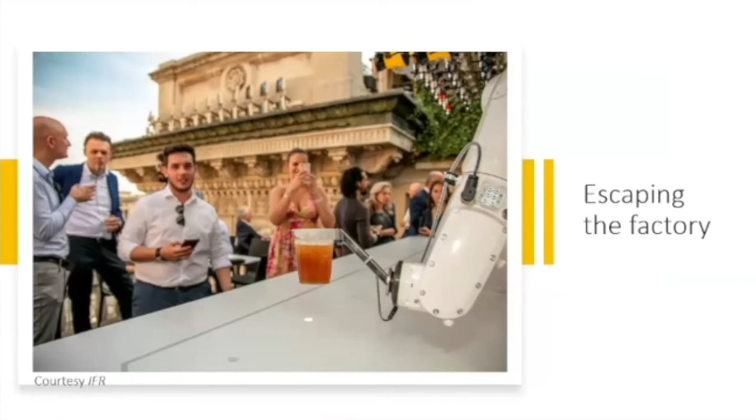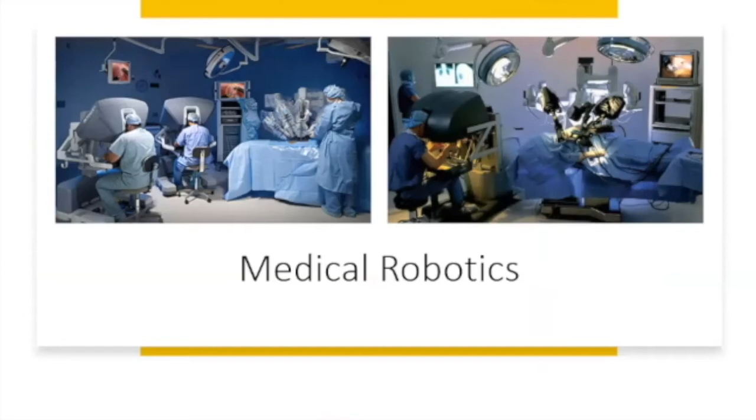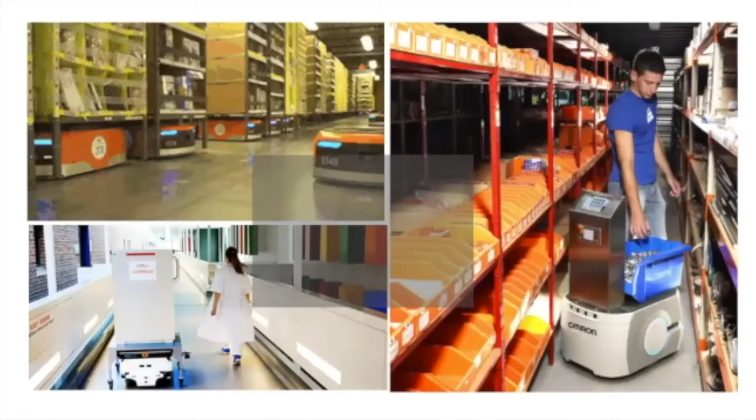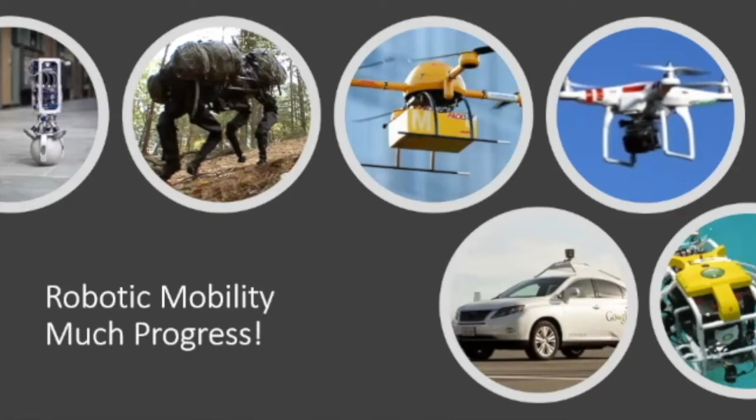Robotics is growing, and there is a lot of excitement and expectation in the world. Robots are leaving the factory floor, reaching closer to humans. In medical robotics, we are performing thousands of surgeries every day around the world. We are seeing major transformation of robots reaching applications in domains that were very difficult to reach, such as agriculture, field robotics, underwater, in mines, factories, warehouses, and hospitals. In all these areas, robots are becoming part of the environment where humans and machines work together.

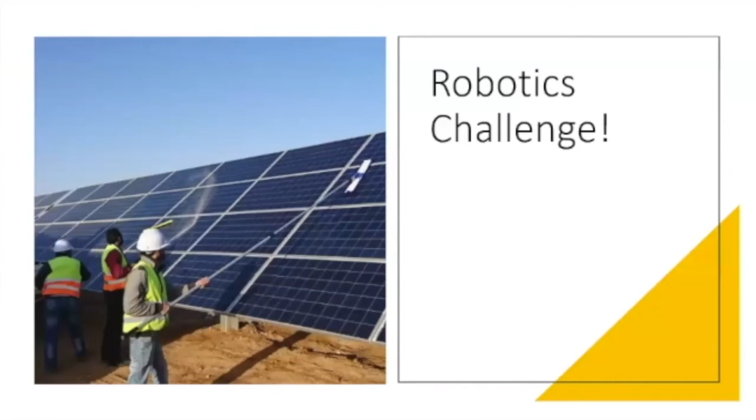A lot of progress has been made in mobility, and we see robots on land, in the air, underwater. We are also making progress in manipulation, which is much harder. Manipulation requires physical interaction with the real world, and there are many challenges to do this properly.

The challenge is that when we interact physically with an unstructured real environment, manipulation requires a lot of careful planning. The progress we've seen in manufacturing resulted from being able to place fixtures and structure the environment so we can pre-program the robot, which plays back the same task again and again.

Well, in the real world, the environment is not structured. Here you have an example of how a different modality of control allows us to perform the task. Here, we are relying on contact, and the contact is guiding the motion. The robot is rotating and moving in the right direction based on the reaction forces it feels. This is key to bringing robotics to unstructured environments.

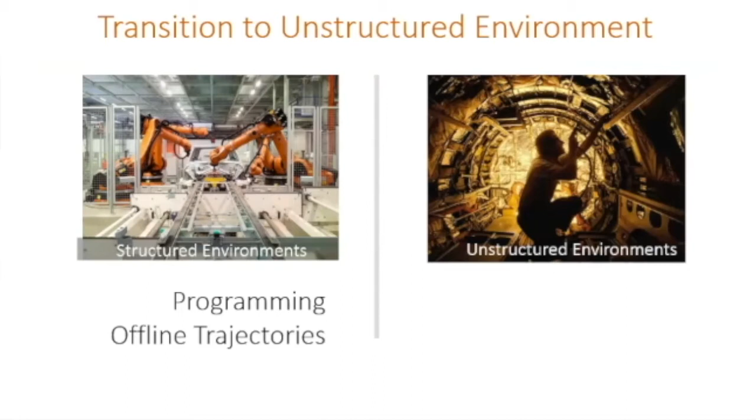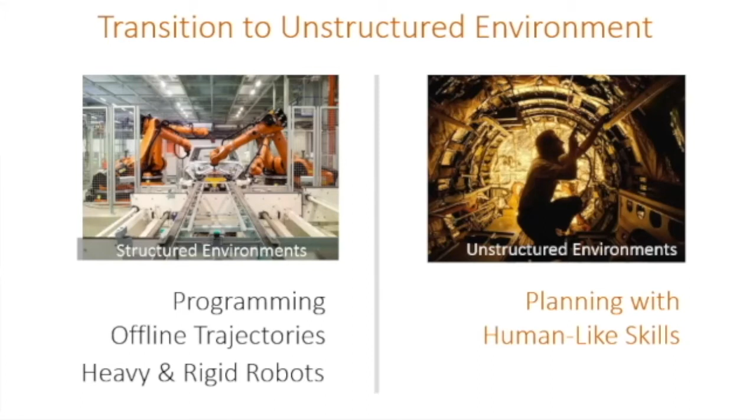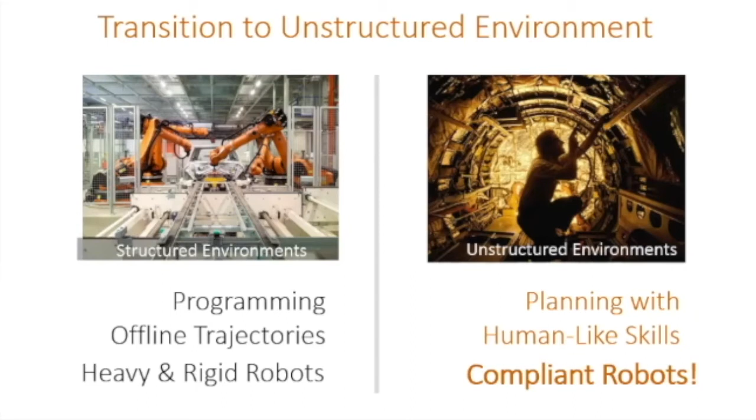There is a major difference between structured and unstructured environment robotics. Programming in structured environments relies on offline trajectories, whereas unstructured environments need modalities like those used by humans, relying on touch and compliance. We need to program the robot at a much higher level using those capabilities. Offline trajectories rely on precision, which leads to heavy, rigid, and dangerous robots. Now we need safe and compliant robots, and that requires a very different modality.

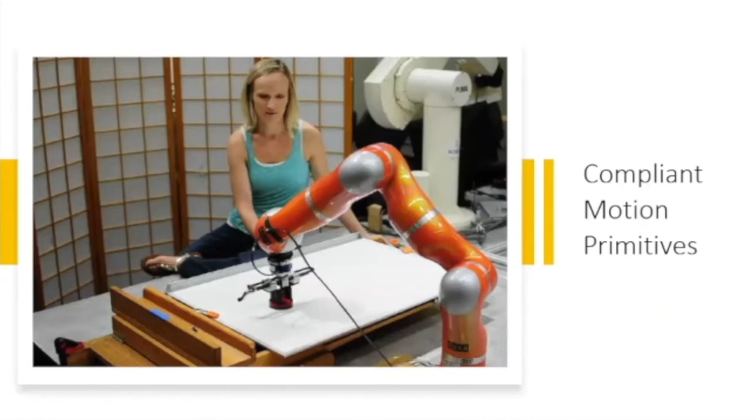So here you have an example of how a robot is moving over a surface that is not stationary. The robot adapts to the changes in real time without having to change its trajectories, because it's relying on contact information.

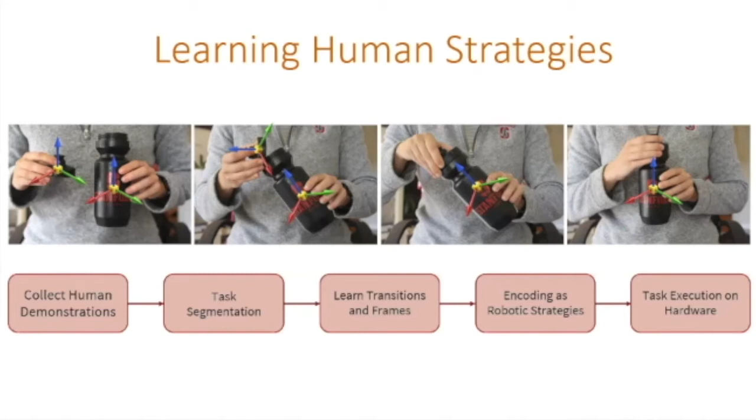Humans make use of compliance, and a little child is able to open a bottle of milk, or a human is able to mold and prepare food without even thinking about it. This is because we have skills that are displayed in real time. The idea we've been pursuing is how we can capture those skills, segment the demonstration of a task, learn from it, encode it in a robotic strategy, and perform it with the robot.

Here is an example of how this is done, and you can see how the robot learns a strategy and is then able to perform it for different geometries, positions, and orientations, in ways that would be very difficult to pre-teach.

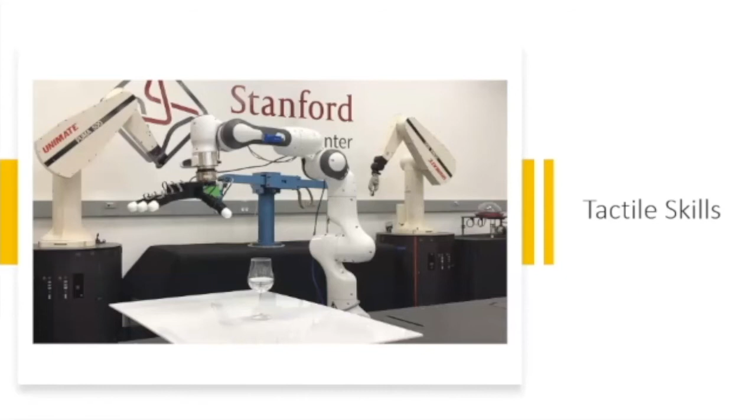So the robot is acquiring a skill, and this skill is going to be taken to applications in different environments. This is a perception skill that makes use of touch and tactile perception to allow the robot to grasp a glass that cannot be seen. However, the glass is now grasped firmly without breaking it.

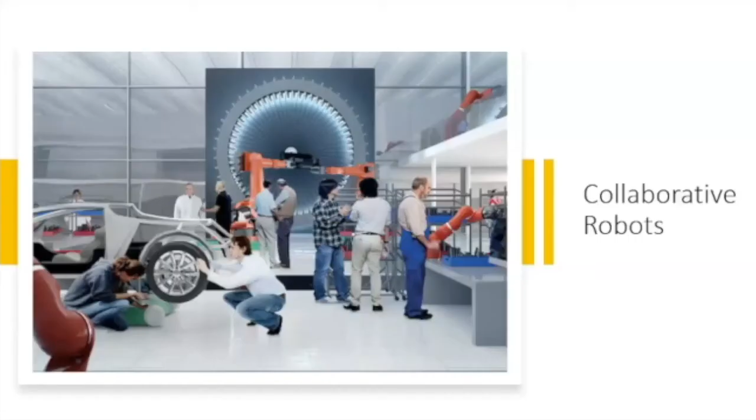Working with humans also requires understanding human motion. We need to model humans in order to interact with them, and we're doing this using algorithms from robotics. Now we're able to model the upper body of the human with more precision and much more muscle representation, obtained from MRI scanning of specific subjects. This is very important in order to interact with specific people.

So the collaboration between robots and humans is going to increase as we build these capabilities and bring compliant, safe robots. That is going to bring transformative changes to the way we interact with machines and the way we build in manufacturing.

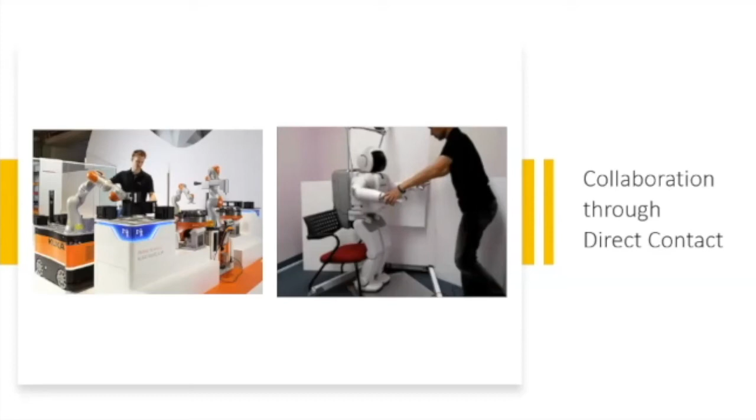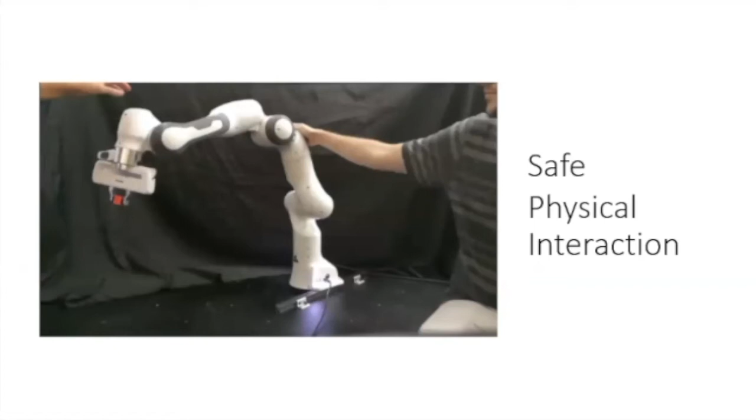Interaction with robots can take place in different ways. Physical direct interaction, as we see here: the robot is guided by the human and is complying with the forces applied to it. The robot is safely interacting with humans and moving away. It's not fighting the forces of touch. Wherever we touch the robot, it immediately responds and moves in the direction of contact.

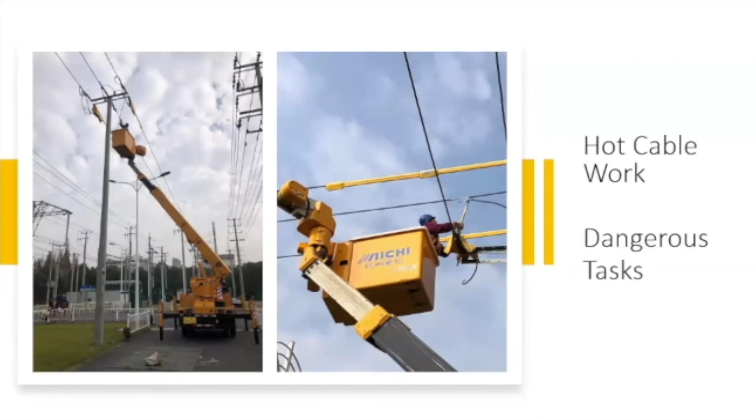Another modality is through haptics. With haptics, we are able to create interaction where the human is guiding the motion and the human is feeling that contact. This is a very important modality, especially if we want to interact with remote robots.

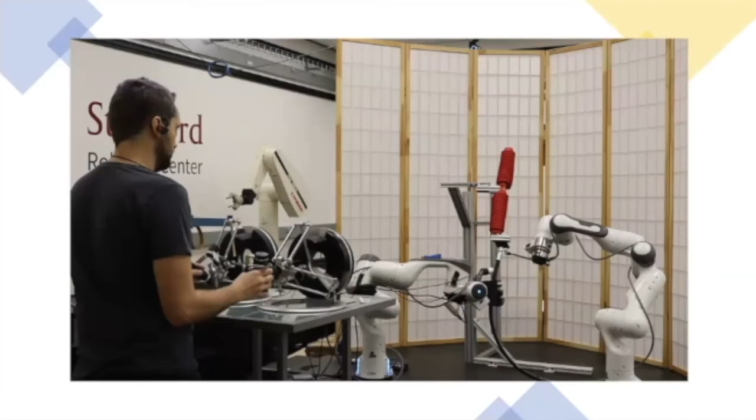Remote robots can be so powerful in areas where we do not want to deploy humans. Rather, we can have the worker placed in a safe location, interacting with a robot, where the robot is substituting for the human. This is an example of the same task performed by the human, and the human motion is guiding the robot, and the robot is going to be able to disconnect this cable remotely, so the human and the robot do not need to be in the same space.

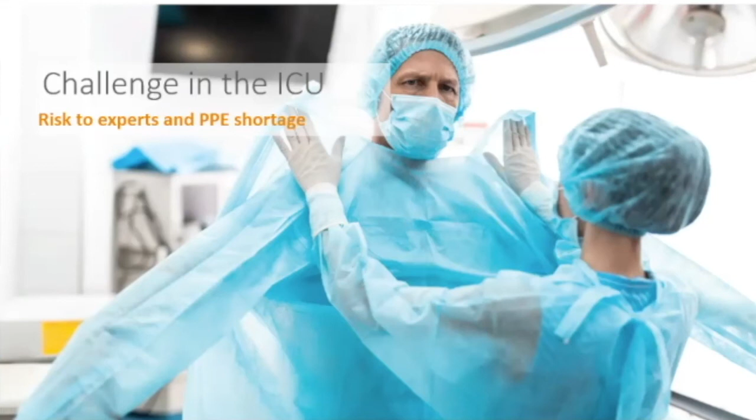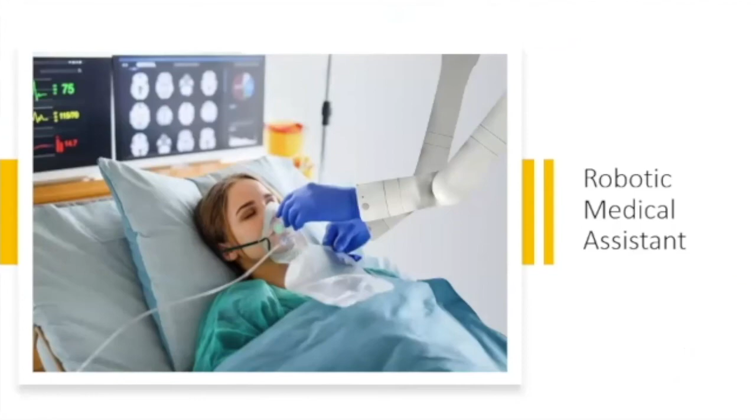This ability can be applied today to the current situation where we do not want to risk physical interaction between doctors and patients in the ICU room. And it would be wonderful to have robots that are assisting in this task.

Of course, these robots are not going to be completely autonomous. We are going to connect these robots haptically, and the physician will be able to interact gently with the human, and the physician is going to be able to interact with other physicians and experts and acquire the data all remotely from the safe location of the office of the physician.

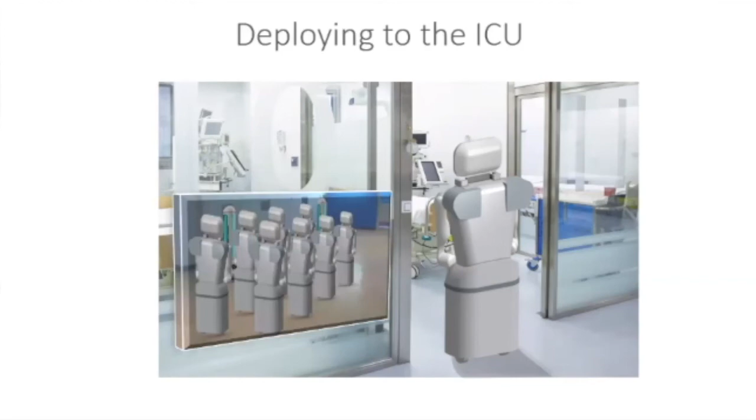So this idea can be explored by taking the robot from one room to another, where robots are disinfected in a special location and operated remotely from different locations.

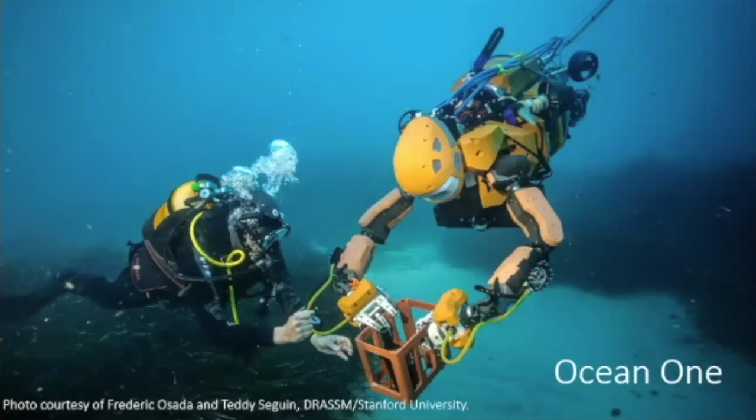So we can see how robotics is going to affect health, the medical field, wellness, service, industry, and many applications in field robotics. I'm going to show you an example of field robotics that we have taken at Stanford.

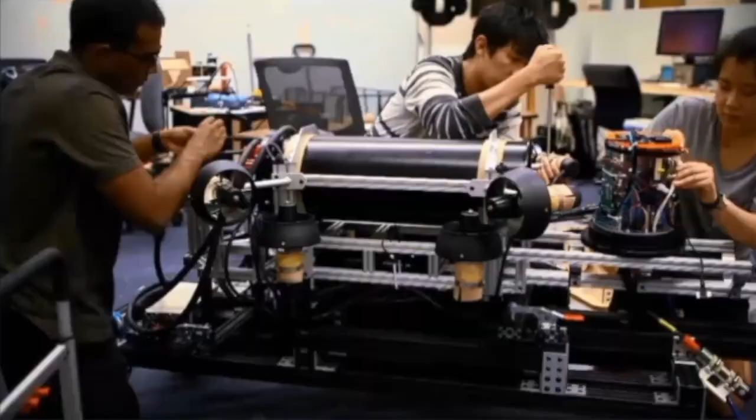This is a robot called Ocean One we built at Stanford, and this robot went on an expedition in the Mediterranean. This robot was built at Stanford, and here you can see the students assembling the robot.

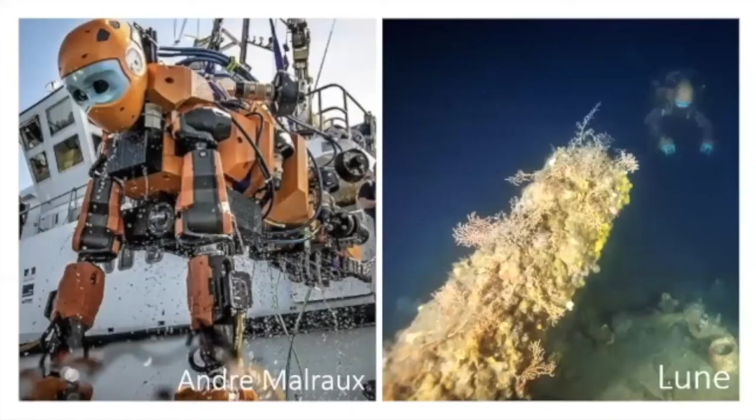This robot cannot be deployed, operated, or tested in the lab because it's designed to float in the water, and the only way to test it is to take it to the field or to a swimming pool. So we're going to take it to the swimming pool, and there the robot is going to go through a special ramp that would allow it to float.

Once the robot is in the water, it has no weight anymore. The weight disappears with buoyancy, and the robot here is being tested and controlled haptically. So haptically, we are able to interact with the robot, and you can see here how the robot is moving in the water and ready for its expedition.

The expedition took the robot to the Mediterranean, carried by a vessel called the André Malraux, which belongs to the Ministry of Culture in France. This was an archaeological mission, taking the robot to 100 meters, where we found this vessel, and you can see on the right one part of the vessel's cannon still standing.

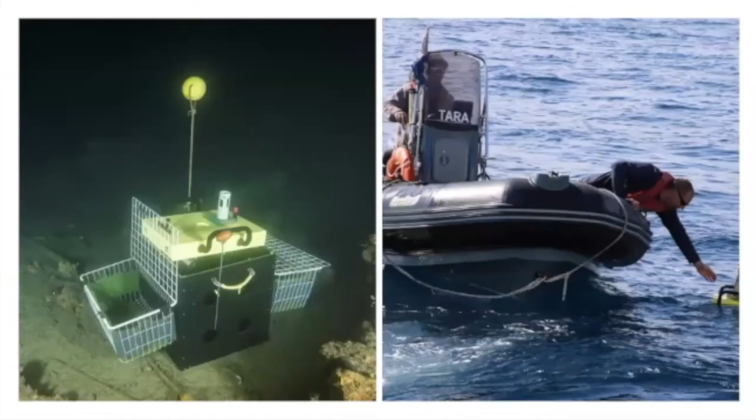Our colleague wanted us to go and reach that area. You can see how we are controlling the robot haptically by interacting with the haptic device, monitoring the cameras seen in this control room. Once we reach and place the object we recover in the container, we need to close it, and then the container comes on its own to the surface, as you can see here.

The container that came back to the surface brought a very unique object: one that comes from four centuries ago, a vase from Catalonia dating from 1664. And you can read the history of the sea on the vase. This was a very exciting recovery of an object that was sitting in the water for so many years.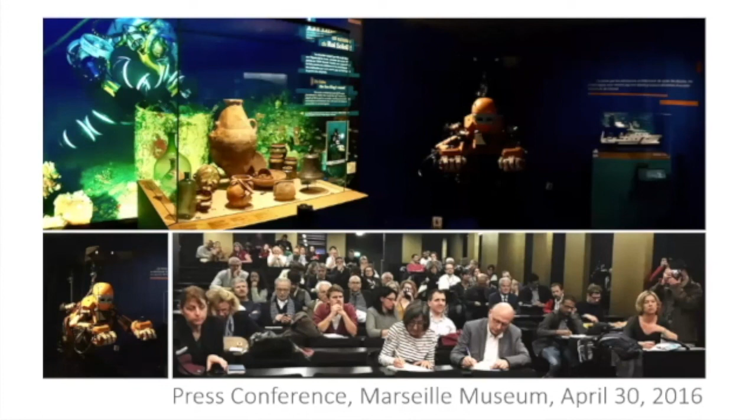The robot, after the first mission, was placed in the Museum of the Sea in Marseille, France, and many people wanted to come and see and visit the robot. So we left the robot there for a month before returning to Stanford. The media, all the media, was there to cover that story.

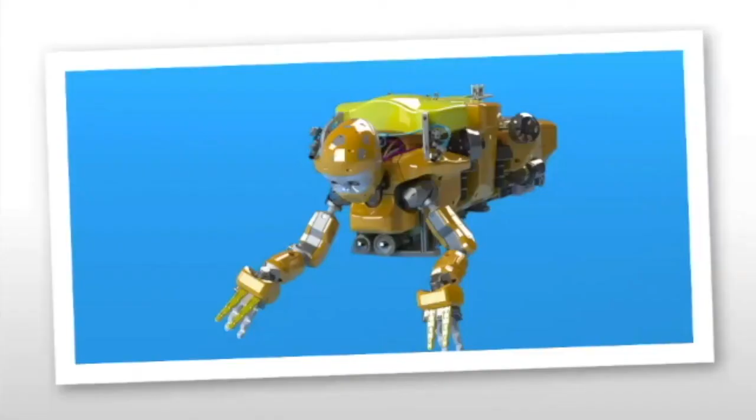Now, this was also an incredible experience for our students, being together with scientists from archaeology, marine biologists, and different groups, all working together.

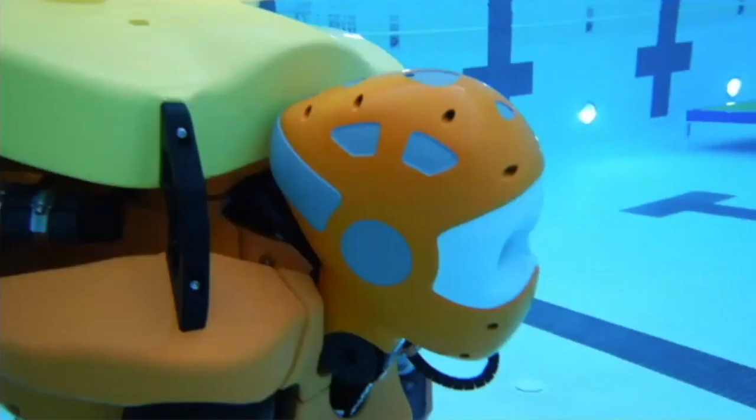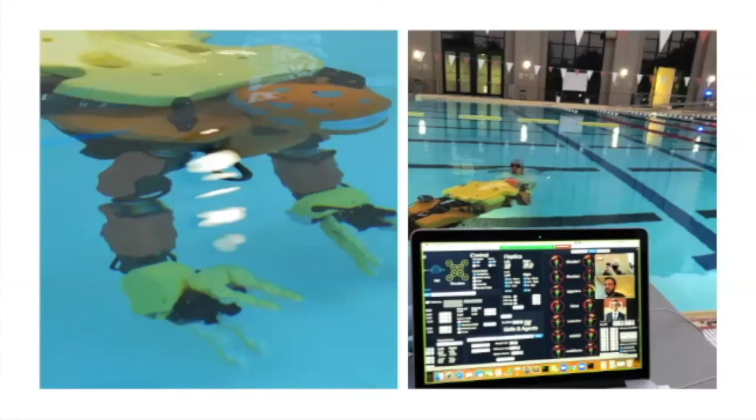Over the past few years, we've been developing a new version of the robot, much more powerful, capable of going to 1,000 meters. We just finished this last week, and in fact, I have a photo for you. Today I was in the pool with the robot, and here is the robot being controlled in the pool, getting ready for another mission that will take us to 1,000 meters.